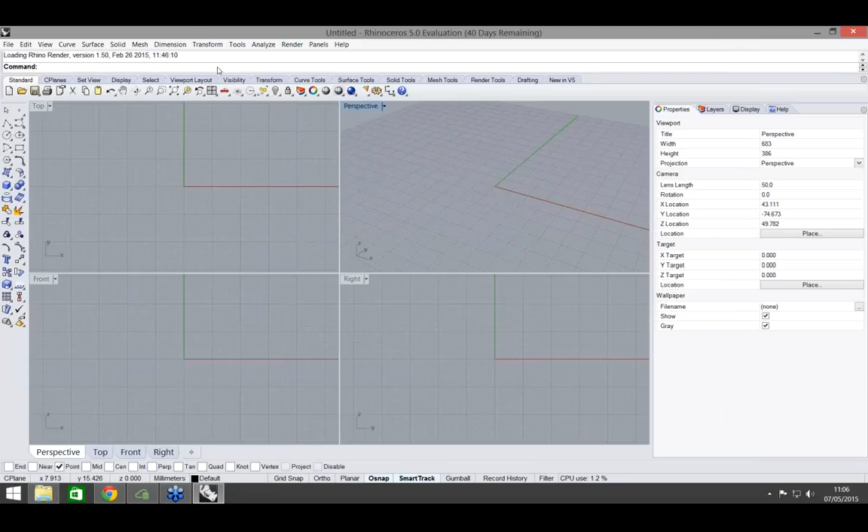When I was showing this to people initially, everybody I showed this to in the architectural sort of arena asked us if we're going to do a similar sort of thing for Rhino, which is where this particular plugin was born. So let's get started. We've got Rhino loaded now. All of you familiar with using Rhino know how to install the plugins. So let's just get it started now and just go to the command line and type in Arena 4D.

And that should bring up a panel which you can dock anywhere you like, you can move around, and that is effectively our Arena 4D plugin. So that has now bolted on the point cloud engine into Rhino. So you now should be able to load very large point clouds natively in Rhino and edit those point clouds and create architectural models as you see fit.

Okay, so just to talk very quickly about the tabs along the top of the plugin. If we go to the About tab, this will tell you the version you're using and whether it's a trial version or whether it's a fully licensed version. Now, just to point out, if you've downloaded or are looking to download the trial version from our website, you will get 10 minutes of runtime.

After that 10 minutes has expired, your point cloud will vanish from your viewports in Rhino, but you can restart Rhino and then you get another 10 minutes. It sounds restrictive, but it gives you a good chance to understand whether the tool does what you want it to. Okay, next one along is generator.

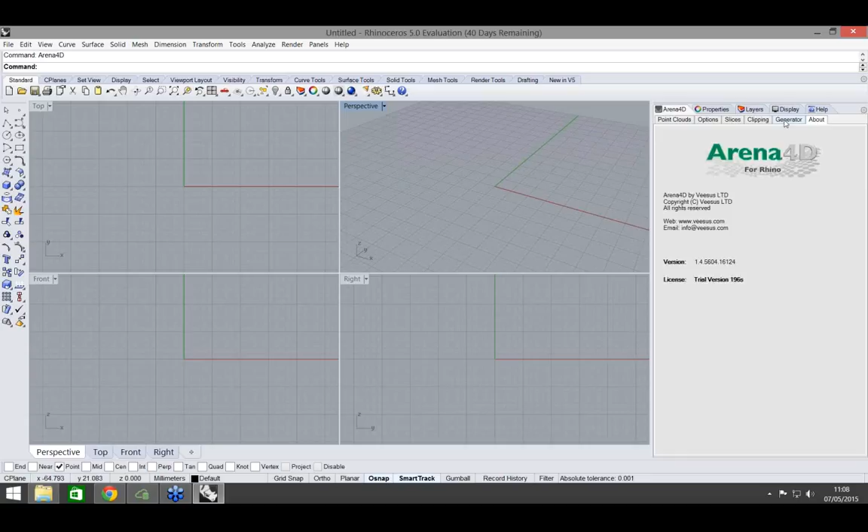Now this is the generator that resides in Arena 4D Data Studio, and we've simply extracted it and put it into this plugin. So this allows you to import point clouds, your own point clouds, your LAS point clouds, your PTS point clouds, XYZ, ASCII, etc. in Rhino, without having to go into other products and actually do it that way.

We've also got some support for NCTech's color cloud. So if you have an NCTech camera in your inventory, you can simply come into Rhino, point the software at your point cloud data, which could be captured with your scanner, and then point it at the images that were captured with the iStar camera, and it will color it and create a point cloud for you, and it will load it into Rhino for you straight away.

Okay, once you've imported, we create our own proprietary format, and that is called a VPC file. So imagine we have done that, you don't really want to sit there watching us import a huge point cloud. You come into the point cloud tab, there's some buttons along the top of the window here. One is the plus key, so if we click that, that allows you to open a point cloud, as you can see there, or VPC.

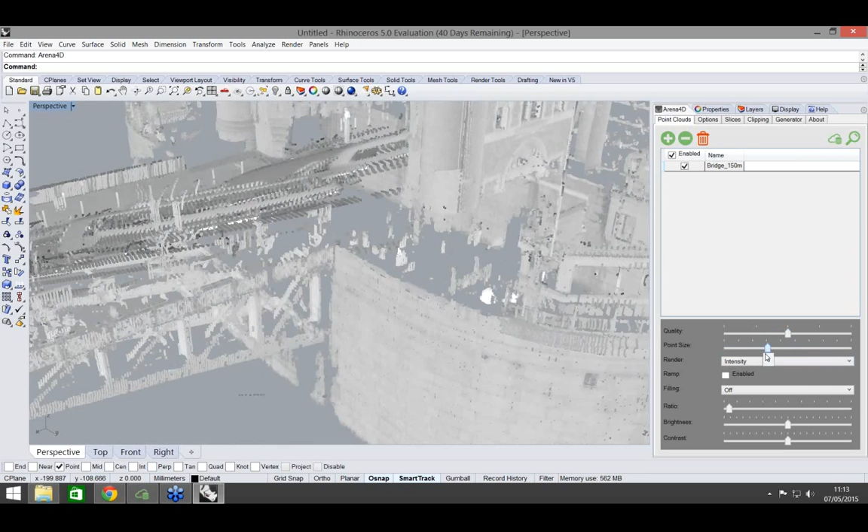Okay, right. The next part on this particular set of options is the render. So your render could be intensity, which is what it is right now, or you can colorize the point cloud if it has had color applied to it. So you can now see that the point cloud is now color, and you can definitely see that that's Tower Bridge.

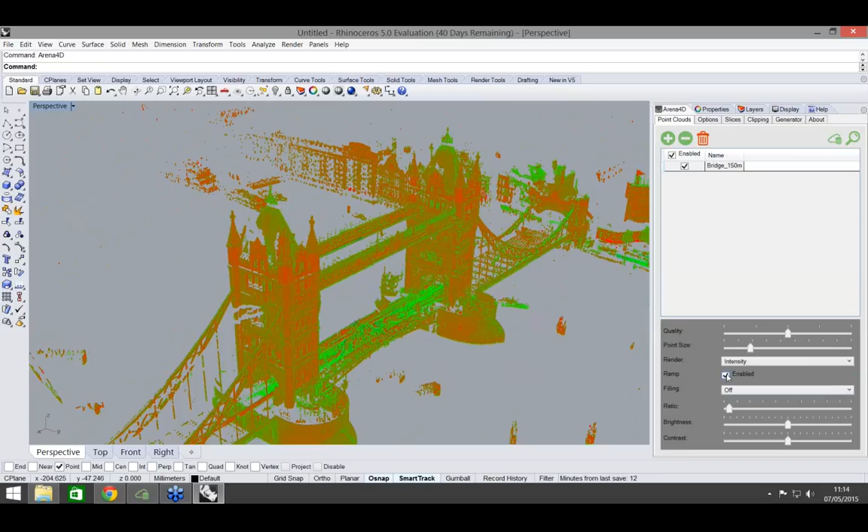Okay, so just coming back to intensity for a moment, just to show you the next option. We've got this ramp tick box. So we click the tick box. You can see the colorized points associated with the intensity appear there. Now, it's not a very complicated set of scan data, this, so the color ramp isn't as defined as you would get in some scan instances, but you can see what that's doing. Okay, turn that off. Come back to the color mode.

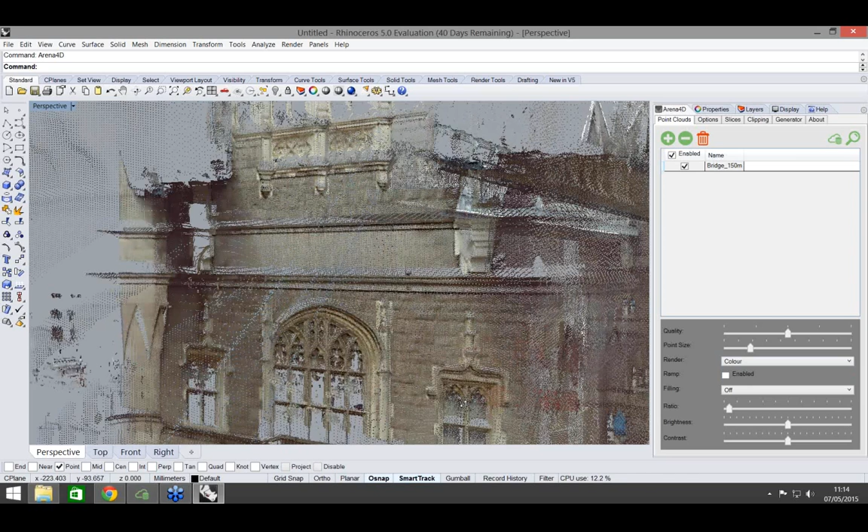The next one is a pull down, which allows you to fill between points. What I mean by that really is it allows you to make your point cloud a bit more solid. So it's something we term as a solidification of the point cloud data without actually moving away from the data being points. So we're not doing polygons in between points or anything like that. We are simply solidifying the point cloud data.

So if we turn it on, you'll see that the sparse data that was in front of you has now been solidified and blended together to try and make the surface look and feel more solid. Okay, and you can drag the size of the solidification with the ratio bar underneath the smoothing pull down.

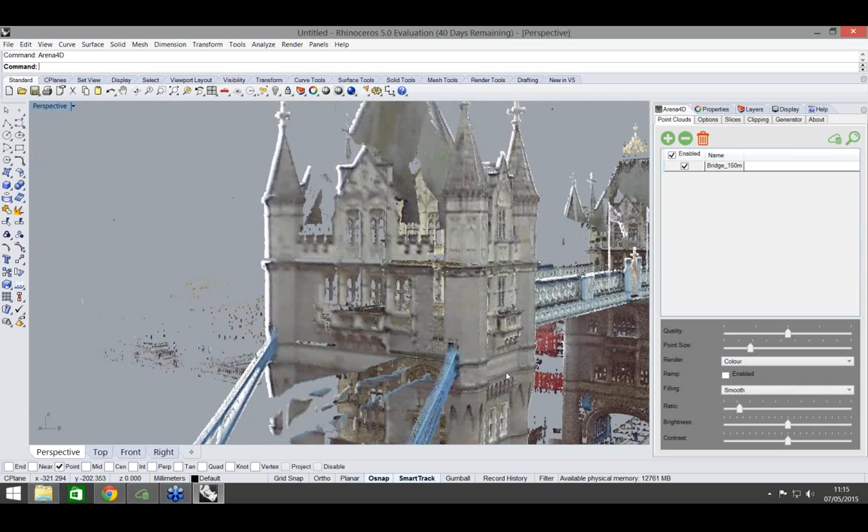Okay, so it allows you to get more from the actual data set without actually stepping away from it being point cloud data. And when you step away from the actual data itself, it looks very solid, it looks very real. And if we just pan around the bridge slightly, you can see exactly the effect that's had. It looks better than just point cloud data.

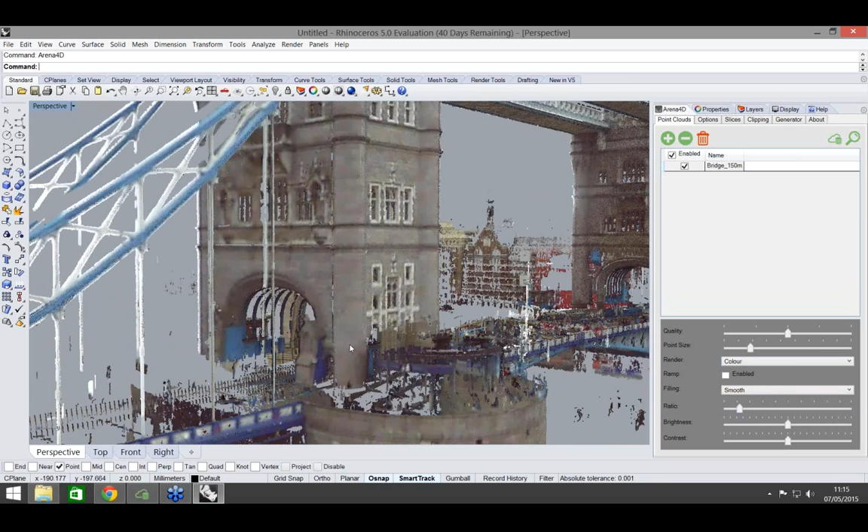Okay, that's great. The next two slide bars are brightness and contrast. They kind of speak for themselves. But if we drag that up to the top, some scan data can be extremely dull, and it can change between scan locations, and it can change between photographs applied to the actual colorization of the point cloud. By dragging these bars, you can actually get a far better understanding of the data and a much clearer, crisper understanding of what you're looking at.

As you can see, the contrast has changed that quite significantly, and that might bring out detail that you couldn't see with the contrast set to 0. Okay, so just drag that through a little bit so you can see the actual difference it's making, and then we'll stop at an appropriate level, say 0. Okay, so let's just zoom out a little bit from the Tower Bridge, and we're going to go to the next tab, which is the Options tab.

We're developing this tab as we go along, as we get feedback from customers. Any suggestions anyone's got for adding more functions to this particular plugin, we're completely open to listening, and we're very happy to listen to those suggestions and change it as we go through the development of the plugin.

What we've got right now are the 4 options you see in front of you now, and the top one being lighting. It's by default switched off, but if we click it and turn it on, it's quite subtle, but yes, they look quite good there. If you look at the edges to the building just here, if we turn it off again and turn it back on again, you'll see the effect that has.

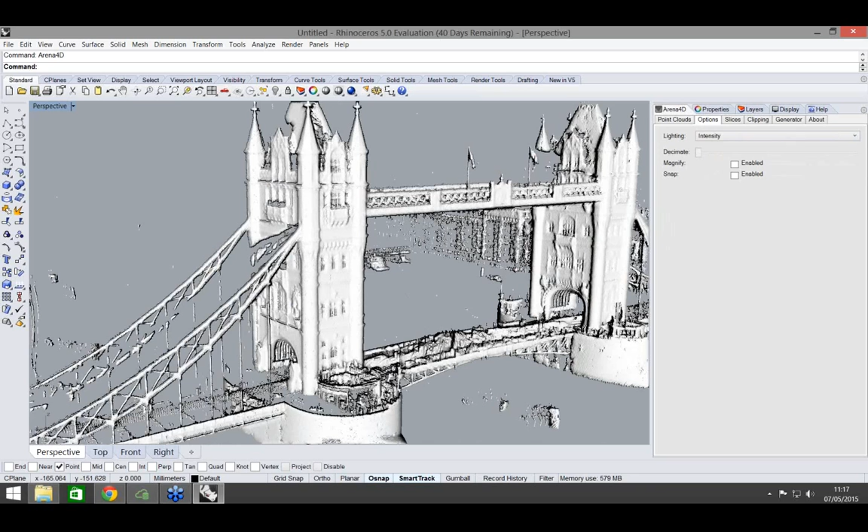So point cloud data, we turn lighting on, you'll then see that become far more crisp. So it's emphasizing the edges, the detail, the window frames of this particular piece of scan data, and it is actually quite useful for modeling from the data. Okay, so that's applying to the color. The next one is intensity, so if we click that on, that's done the same thing, however it's done it to the intensity values of the point cloud data.

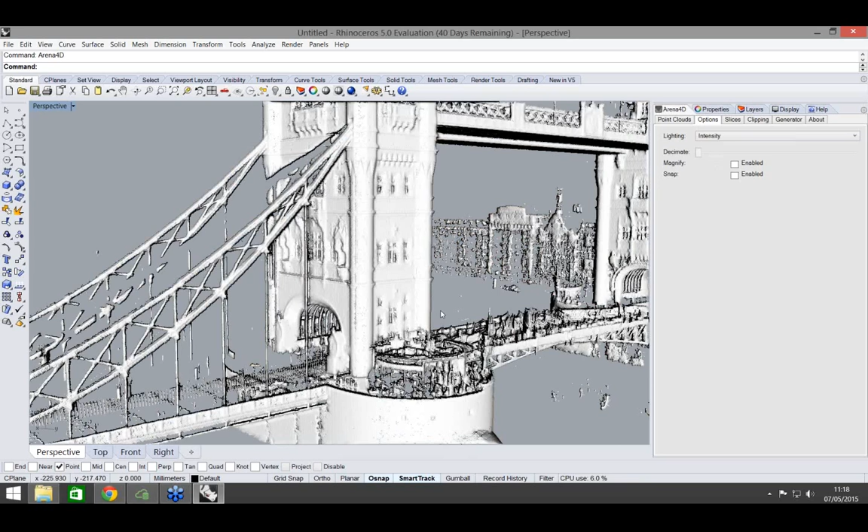And that allows you to bring out additional detail that you're looking at. Okay, so we just zoom in slightly, turn it off, turn it back on again, and you'll see the subtle difference that you're getting there. Now, this data set is okay for showing the capability in this way, but some interior scans and some more detailed scans really do benefit from being able to get some additional detail from the point cloud using this function.

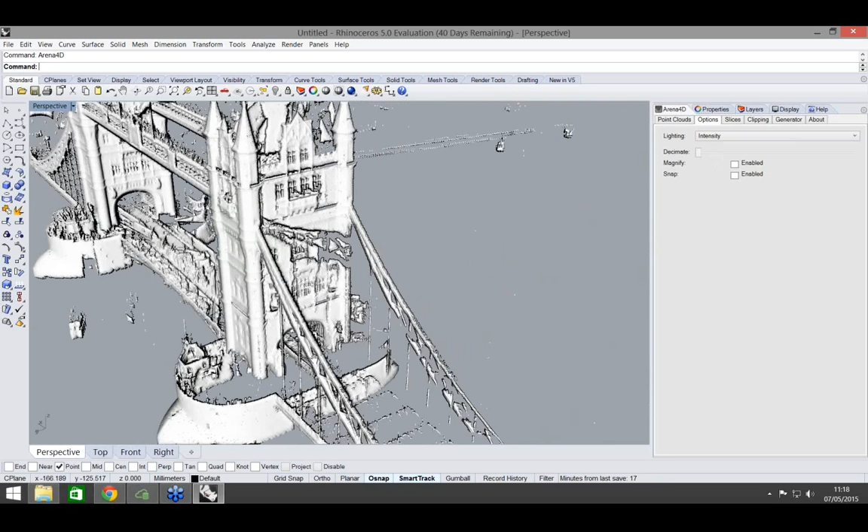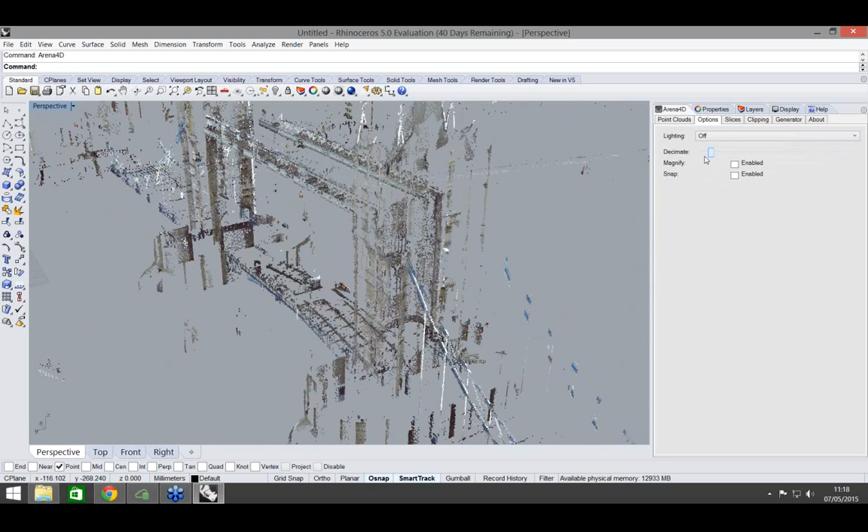Okay. The next scroll bar down is decimate, so if we just go back to turn the lighting off. The decimate's not something that I would use because I don't really use Rhino, but it's something that allows you to remove detail that could be in your way when you're trying to model from the actual point cloud itself. So if I just drag that again quickly, just come back down to the top-down view, and we drag it. You see it only affecting the perspective view and not the other three. Okay, so it purely allows you to model in one of the other views whilst removing data from the perspective view.

Okay. The next tick box is magnify. If we enable that, what that does is it magnifies the point which is underneath the mouse cursor, not what's underneath the actual circle. The reason for this is that it's very easy, particularly at this distance from the point cloud, to click on a point behind what you're trying to click on. So if you look at the subtle difference between the color of the magnifier, that is the flagpole and that is the bridge part behind. So it's allowing you to ensure you're clicking on the right thing. Many times I've done measurements and things like that using point clouds and clicked on the wrong thing, thinking that I'm clicking on the right thing in the foreground when I'm actually clicking the background. So that's quite useful in some instances, not all, but it's there if you need that.

Right, snap is a very useful tool, so we need to zoom in quite close to the point cloud here before you see what it's doing. You see the points dispersed at this particular location, so if I turn snap on, this snaps to the points. It picks up the closest point to the cursor and snaps to it. Great for measurements, great for drawing down a line or making a slice or what have you down the actual data itself. So it is very accurate and goes directly to the point itself. Speaks for itself. Okay, that was the options. Like I say, we're open to suggestion as to what we add to that next.

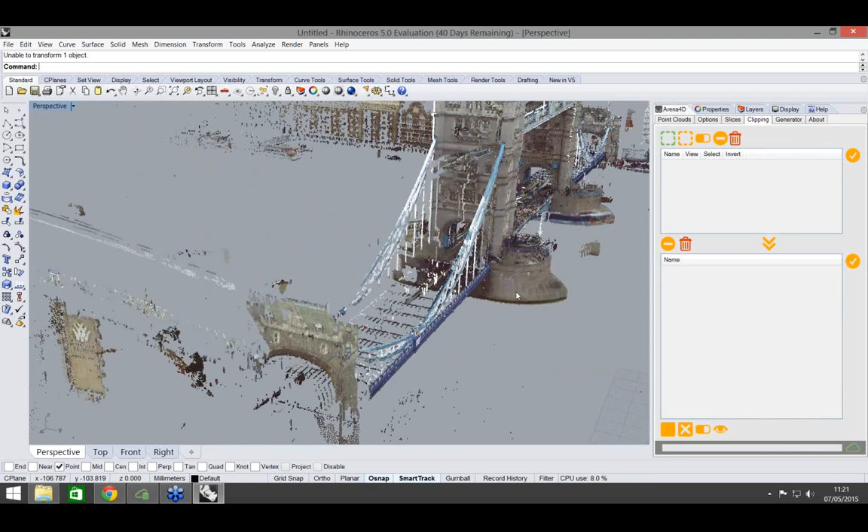Next thing we're going to show is clipping. Now, clipping allows you to isolate an area of the point cloud. So if we just make a new clip by clicking on the green box and simply using the left click to highlight this part of the bridge, and then right-click to select, that's turned green. That means it's selected. So that's a clip. Okay, we're just going to turn on the lighting against that selection, and you can really see some of the detail come out when we've got that switched on. So let's turn it off again and go back to the clipping.

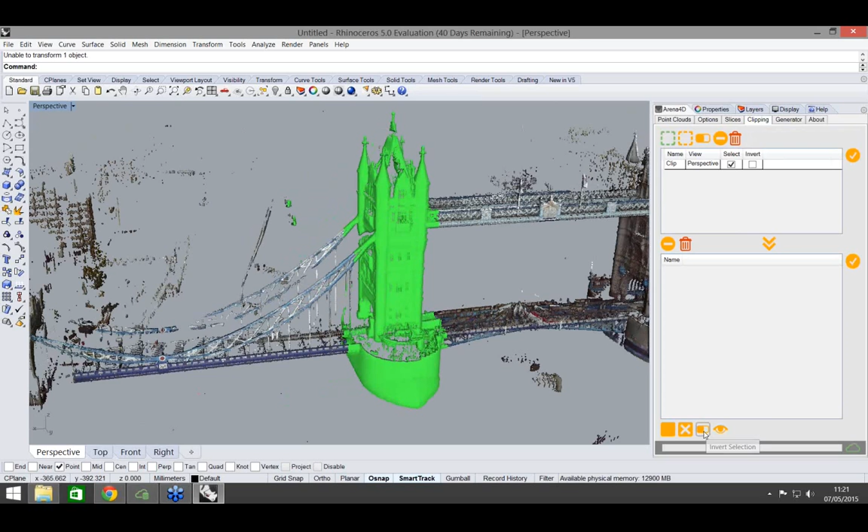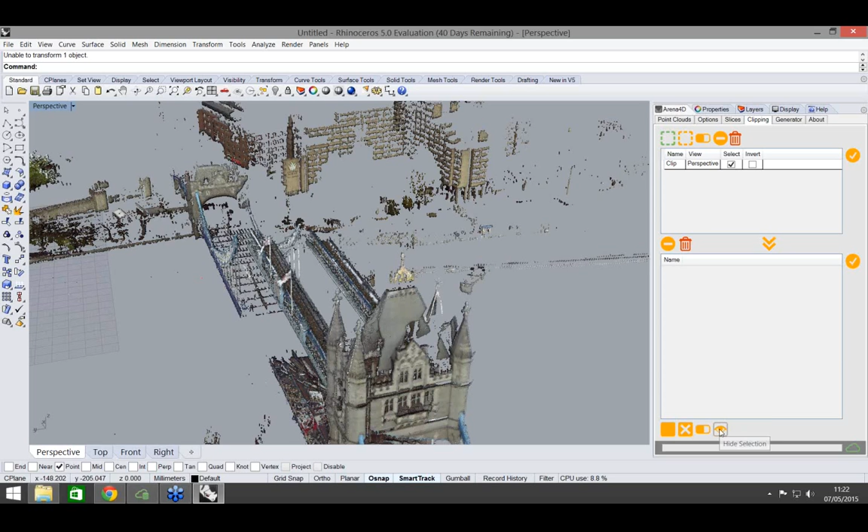And what we're going to do now is we like that. We can do two things. We can either invert the selection, so we want to select anything else other than the clipping selection we made, or we can just hide everything else. So clicking the eye button hides everything that was selected. Okay, so isolating that part of the point cloud. Okay, let's just unhide that. Okay, and go back to the selection we've made. And we want to keep this, so we can create a new clip, which we have just there. And we can do other things like clear the data, or we can remove it, or we can use it for another day.

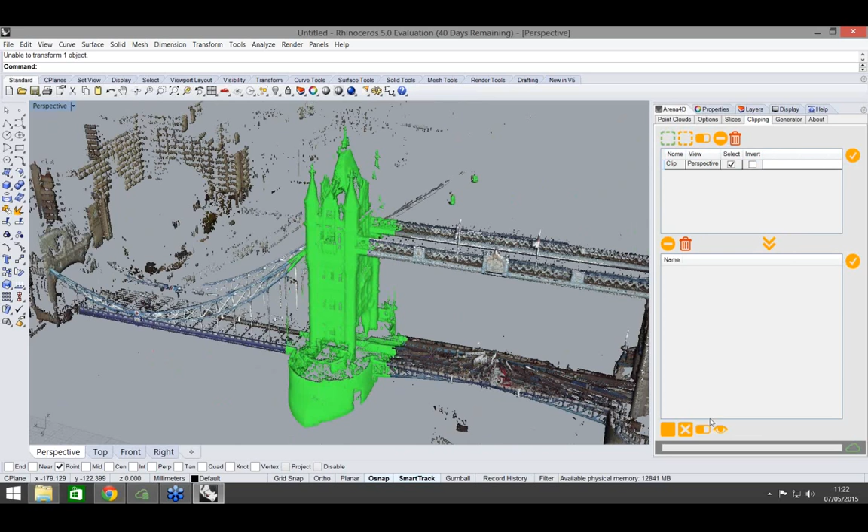Okay. The bottom box of this clipping pane here, that allows you to merge clips together. So you could create one clip like I have there. You could make another one like so, and then you want to keep both these as one group of clips. So use the arrow button and you've now got a group of clips which comprises both of the clips in the top box. Okay. Okay, export.

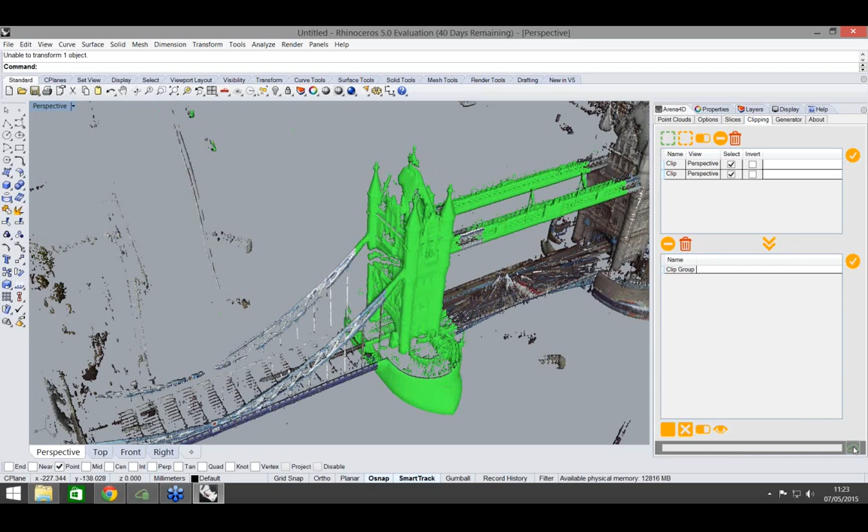Okay, right, you can then export that clip to a native Rhino point cloud, if you so wished, because you can isolate a very small part of this point cloud. You don't want all of it, you want to use just one small part of it, and you want to be able to use that in the native Rhino format. Clicking that cloud button down there does exactly that. Okay.

Okay, next part of functionality is slices. Slices are the ability to select part of the point cloud, which we're going to do right now. So add a new clip just here. We're using the top-down pane. So we've added a slice, and you can see the front view has a slide bar. Okay, a red slide bar. And you can change the width of the slide bar. So in this case it's 1 meter. We can make that something less, 500 or even more.

Okay, and we can then either just drag that, and you can see the effect that has in the top-down view. It's affecting nothing else, so the perspective view is not being affected right now. So it's just dragging it up and down, and you can see it's isolating just the points in that particular slice. So you can then start to model around that particular piece of data. Okay.

Or if you wanted that to affect the perspective view as well, you can click the perspective tick box against the slice, and you can see the effect that's having in the perspective view and the top-down view. So just drag that, you can see the difference it's making.

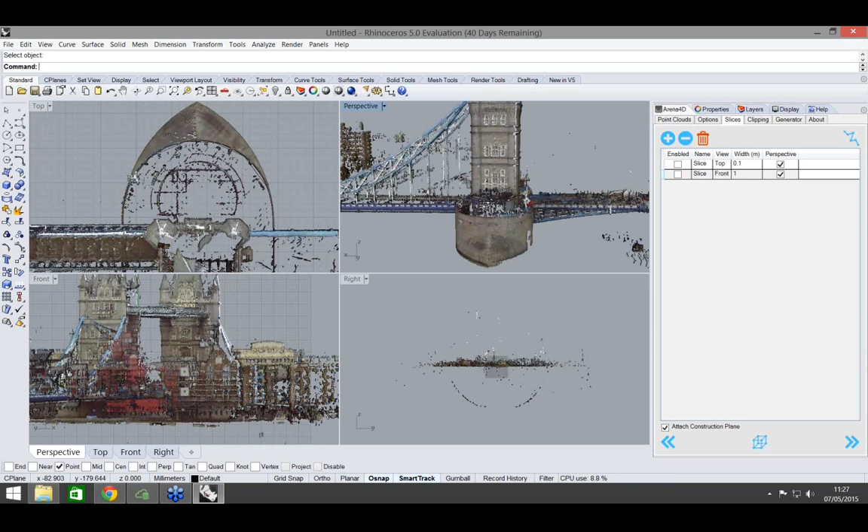Like I said, it's got a very powerful engine behind this, and we really have put these functions in as a direct result of customers' feedback. And this product is only going to grow in capability as we get more feedback from customers. I'm not a Rhino user, but right now we've had some very good feedback as to what we currently have in there, and it has some really good utility to a whole array of different people in different areas. So that's kind of it, and I'm really open to any questions.

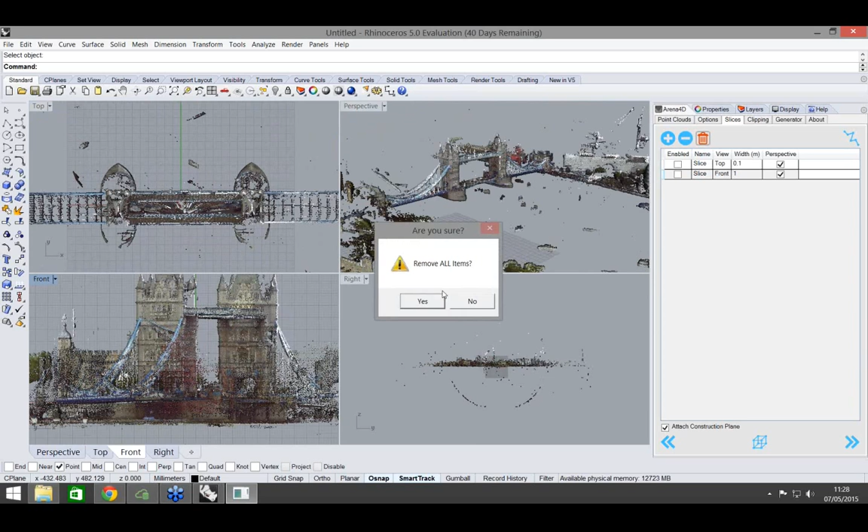Okay, Mark, thank you for that. This is Paul from Simply Rhino here, by the way. Just a single question for you. Are you looking to add customizable intensity maps? Yeah, this is Mark Christie jumping in here. This is possibly one of our most requested features, and we'll hopefully have it within the next month or two. The ability to colour by height or apply a custom colour map to the intensity rather than our current preset one.